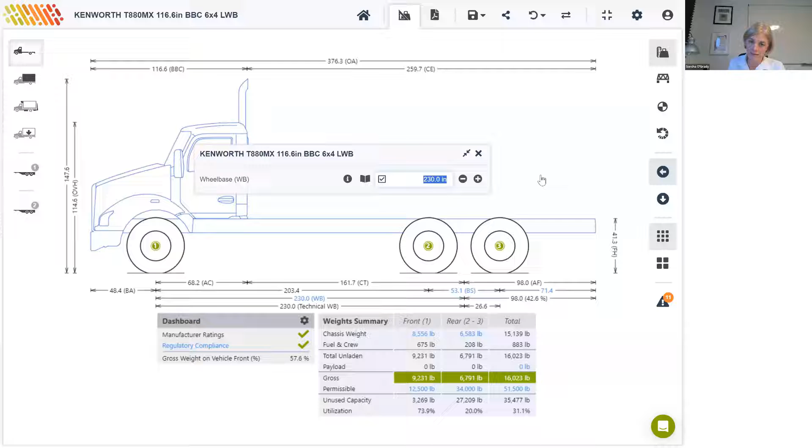There's a detailed weight summary below. I'll get to that later. You've got various views over here on the right. I'm just going to set up my vehicle first so it's ready for what I want to do with it. So I'm going to amend the wheelbase just by clicking on that wheelbase dimension. 208. Also going to shorten this overhang at the back. 29 inches.

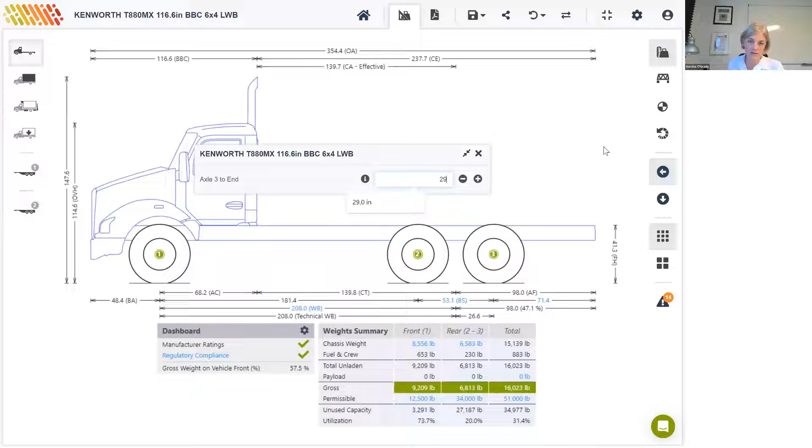And I'm going to open the vehicle menu on the left-hand side to review the axle weight ratings. So I'm going to just increase these weight ratings. Because our focus here is regulations, we don't want the manufacturer ratings to limit what we can do. So I'm going to increase these to the maximums this vehicle would typically go to. I'm going to give it a rating of 23,000 on the front axle. And I'm going to increase that tire width also to 17.5 inches.

Again, as I said, as I'm jumping around here, I'm obviously very familiar with the interface. If you're not, just try to get a general sense of what's going on, but don't worry if you don't catch everything. We could always go through it with you another time.

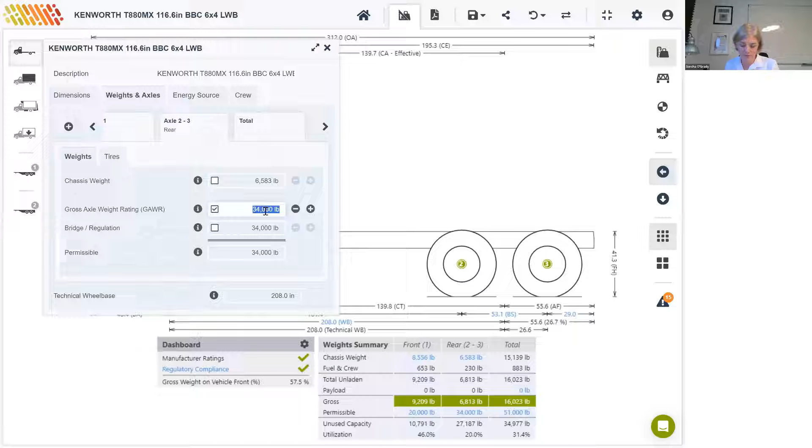The gross axle weight rating for the rear, then, I'm going to increase to 46,000. And the total gross vehicle weight rating to 80,000 pounds. So as you'd expect, this vehicle still complies with manufacturer ratings and the regulations applied. If I click into regulatory compliance, I can see that the current set of regulations that this is being compared to are the Federal Common Size and Weight Regulations.

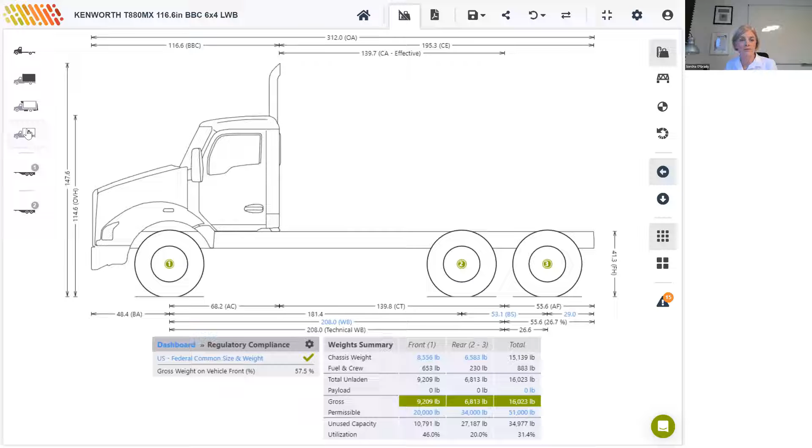So I'll add a body. From the left, I configure my vehicle first, then body, equipment, followed by payload. So I'm going to go to the body, choose a dump truck. And from my team library, I'm going to choose this 16-foot heavy-duty dump body.

So if you just glance below the drawing and take note of this weight summary, or we call it the weights table, you can see that there's distribution of weight by axle. So you've got front and rear columns, and then also the total. If you start from the top and come down, you've got itemized chassis weights, fuel and crew weights, the body weight. Indeed, if you had equipment, those items would be itemized there too. And these are all added to get a total unladen weight here of 21,525 pounds. The total unladen is the weight before payload is added.

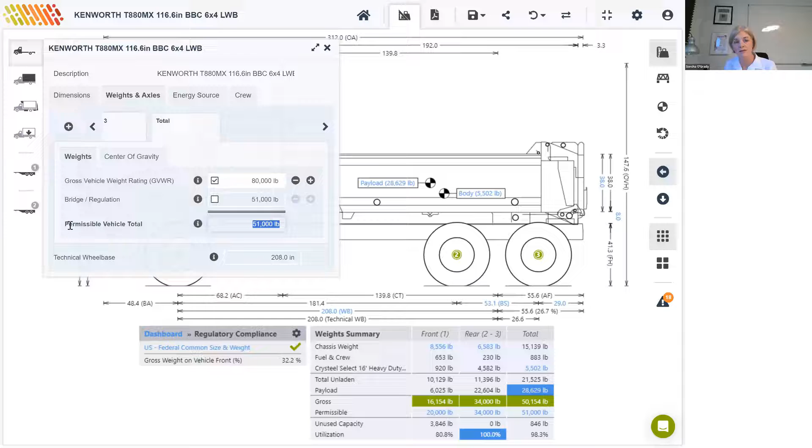We skip a couple of lines, go to permissible. Permissible is the maximum permitted on each axle based on the lesser of the manufacturer ratings and the selected regulations. So for instance, this 51,000 total limit is the lesser of the 80,000 GVWR that I specified earlier, and the bridge regulation limit of 51,000, leaving a permissible total of 51,000, which is going to limit what we can do here.

So we cannot simply subtract the total unladen from the permissible total to come up with the payload capacity, because one of the axles may reach its limit before the gross vehicle weight rating or the total bridge limit. The maximum payload is automatically calculated and then added to the unladen weight to get the gross weights on each axle and the total.

In this case, the gross weight on the front axle with a payload of 28,629 pounds, highlighted here in blue, is 16,154. Gross weight on the rear is 34,000 and total gross weight is about 50,154. The two bottom rows in this table are here for your information. They're basically two ways of representing the same information.

When the gross weight is compared with the permissible weight, it is expressed as a percentage in utilization. So 16,000 as a percentage of 20,000 is 80%. 34,000 as a percentage of 34,000 is obviously 100%.

So in this case, the limiting factor, or the permissible that is limiting the payload to 28,629, despite there being unused capacity here of 846 pounds of the total vehicle capacity, the payload is being limited by the rear axle group, the tandem axle. In other words, the tandem has reached its limit before the GVWR or the total bridge limit.

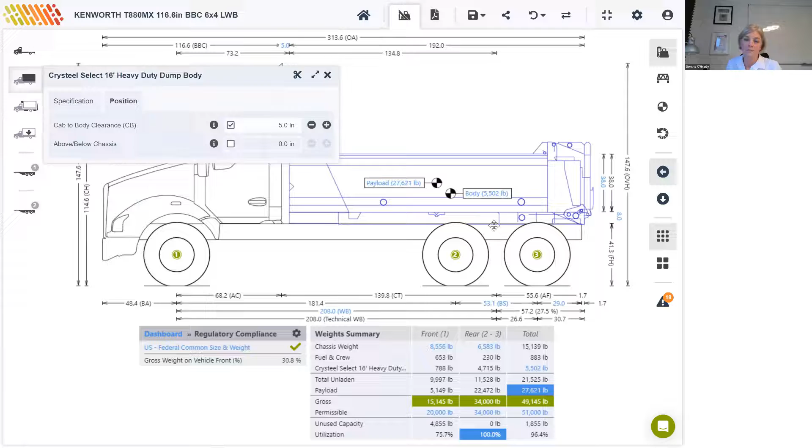So if I increase the cab gap, I will obviously be putting even more weight onto that tandem. Going to increase the cab gap to 5 inches, and you should see the payload drop ever so slightly. Payload is now sitting at 27,621. So a difference of 5 inches in the placement of the body has dropped our payload by about 1,000 pounds.

Before we switch to New York State road regulations, I'd just like to point out the permissibles here. If you take a note of them, got 20,000 on the front, 34,000 on the rear, and 51,000 total. So let's apply the regulations for New York State. Go to regulations applied here, and clear those and add in New York State.

So you'll see straight away that our permissibles have changed. We've new limits to work with. We've got 22,400 on the front, 36,000 on the rear, and 54,000 total. These are all higher than what we had on federal regulations. New York does not have the US federal bridge formula applied, so the maximum weight allowed on the tandem is 36,000 pounds.

Maximum payload now rises by about 3,000 pounds, from 27,000 to 30,079, highlighted in blue again. So we can achieve over 30,000 payload on New York State roads without a pusher axle. Let's see what happens when we add a pusher axle. Go to the vehicle menu, weights and axles. I'm going to add this pusher. And the payload has increased by another 2,000 pounds to 32,193.

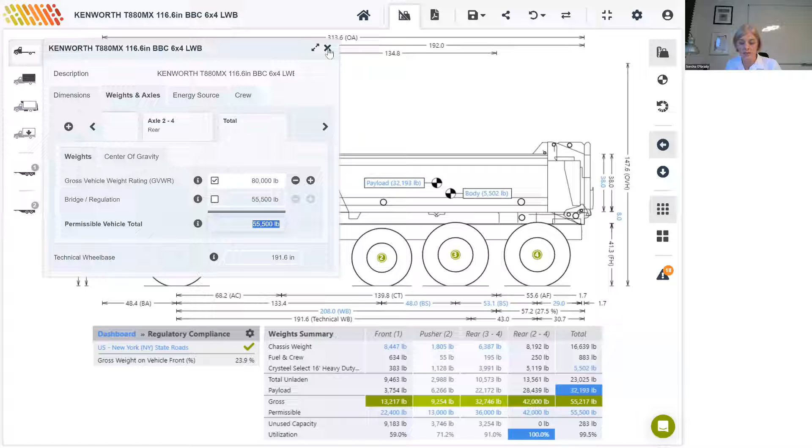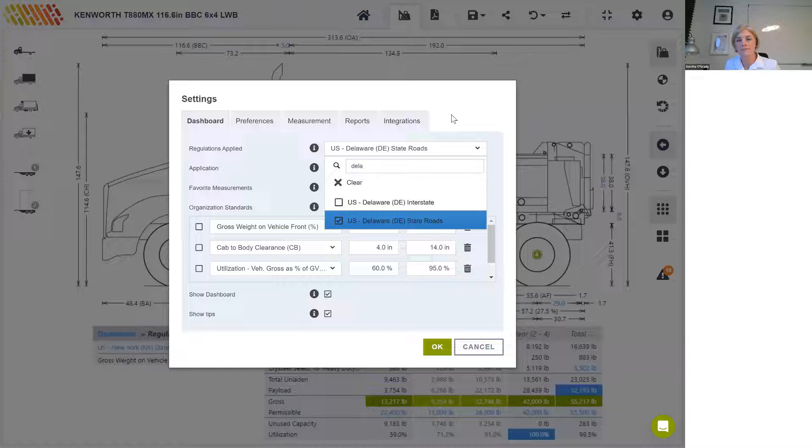Let's see how the same truck fares on state roads in Delaware. Again, I'll just go to my settings, remove New York, add Delaware. Payload figure highlighted in blue on the right-hand side has jumped by a very significant 10,000 pounds. So there's a difference with this setup between New York State roads and Delaware State roads of 10,000 pounds. We're now on 42,725. The limiting factor is now the two rear axles. Axles 3 to 4 are on 100%.

To get even more payload on there, we can try moving more weight onto the pusher axle. So if I click on the pusher permissible here in the weights table, I'm going to increase the GAWR, the gross axle weight rating, to 18,000 pounds. And I'm also going to specify the percentage of the total rear axle group weight that should be carried by this pusher axle to be 30%. And now you see we got yet another 5,000 pounds. We're up to 47,329.

Those of you who are already familiar with the program will notice that the bridge view has disappeared here from the right-hand side, and that is because there is no bridge law on Delaware state roads.

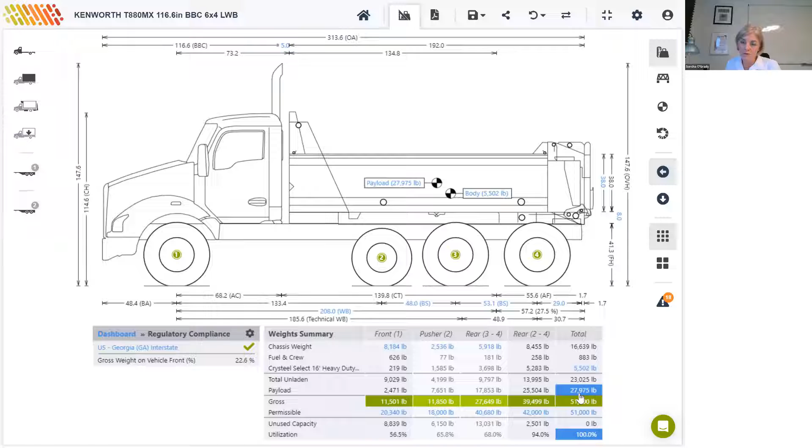There are higher axle limits though, over 40,000 here on rear axles 3 to 4. If I click into it, you can see that that's coming from our regulations, 40,680. The issue here is that Georgia doesn't recognize auxiliary axles, so the pusher axle does not have any impact on the overall gross weight. Maybe the regulations were written before there were lifting axles. So it makes sense anyway to remove this pusher in Georgia because it's only adding to the weight of the vehicle and not gaining any extra weight from the regulations.

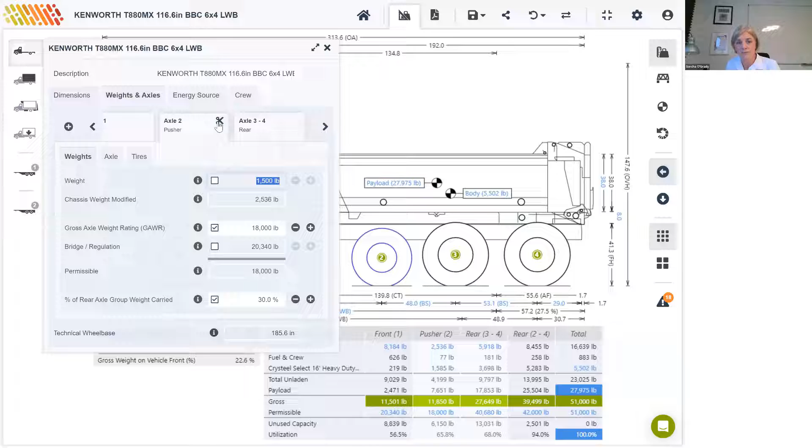So as I remove that axle, you see the payload rises back up to 29,000 because I'm gaining the weight of the axle itself. And now we're getting a little more than we would under federal law. Now let's take the truck out west. We're going to go to Idaho next.

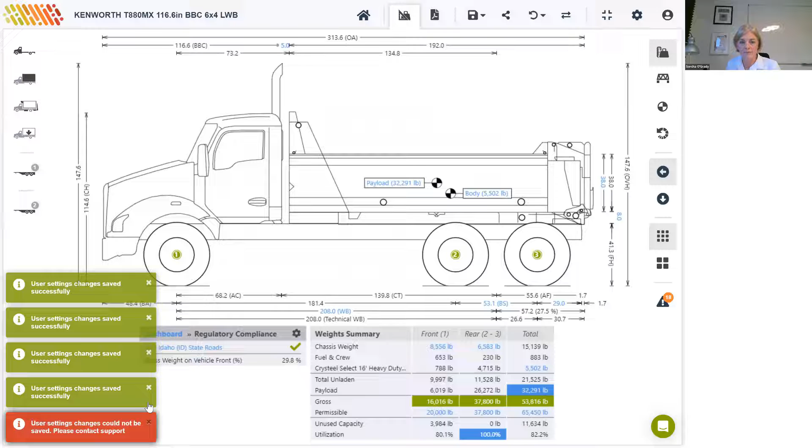Sorry, I clicked that a couple of times too many.

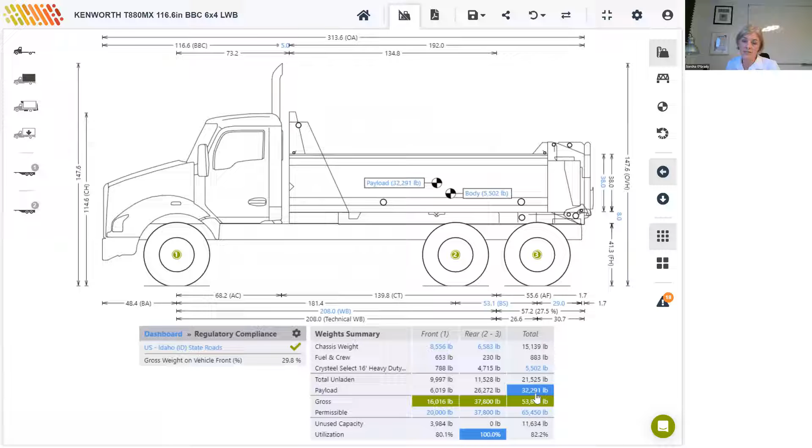You can see here in the permissible row for axles 2 to 3, or the tandem axle, we've got a limit now of 37,800. Indeed, any group of axles with a total distance under 13 feet will have that limit. We've got a payload of 32,291. We can try adding the pusher back now that we're out of Georgia.

We go to vehicle, weights and axles, and pusher. And that's a little bit disappointing. We are down to 27,438 pounds of payload. So the pusher axle doesn't give us a higher limit on the tridem axle group. It's still 37,800 on axles 2 to 4, as you can see here in the weights table. And axles 2 to 4 are the limiting factor.

They're at 100% utilization. So I mentioned that we have different views on the right here. You'll see the bridge icon is back in the second icon there. Bridge is back because we're in Idaho now and the bridge applies. Let's switch to the bridge view to examine the axle spread. So if you look at axle spacing here on the left, you can see that the distance between axles 2 to 4 is 101 inches.

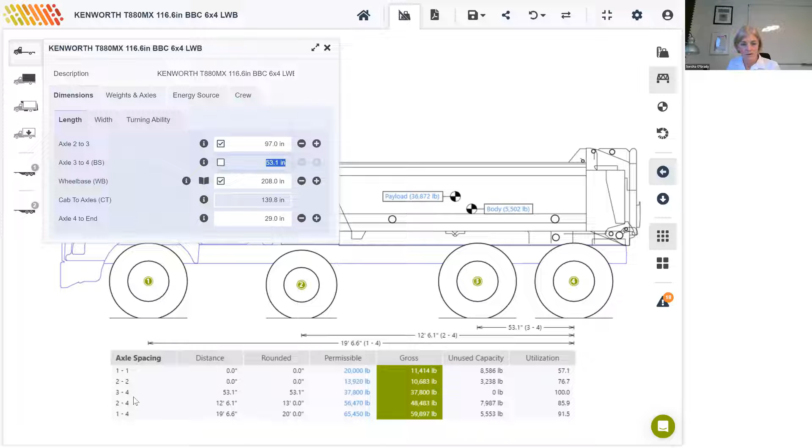We want to go to 13 feet on that axle spread to take advantage of the higher limits in Idaho. So we need to find that axle 2 to 3 dimension. We're going to go to vehicle, dimensions, length, axles 2 to 3. And I'm going to increase that to 97 inches. Now, if you look at the axle spacing again underneath the drawing, you've got axles 2 to 4, and their rounded distance is indeed 13 feet.

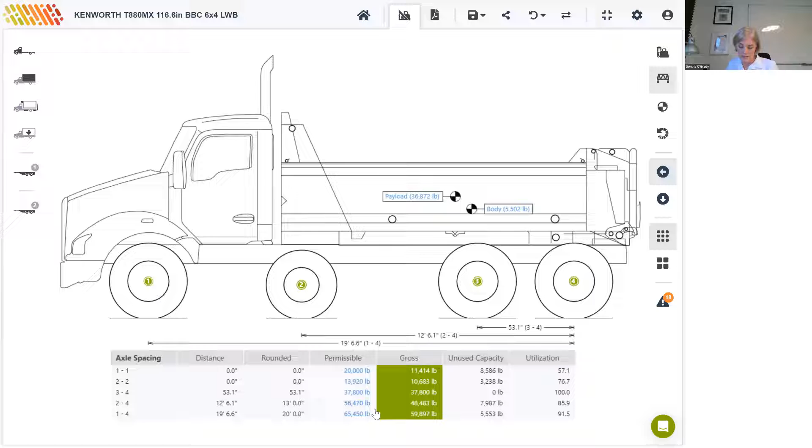So the permissible for the tridem group increases now from 37,800. Let me just get the weights table again. From axle 2 to 4, from 37,800 to 56,470. And the payload has increased from around 27,000 to almost 37,000, 36,872 pounds there.

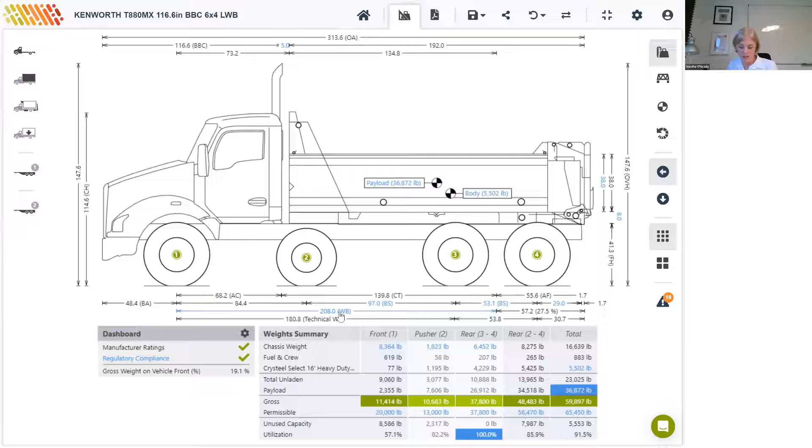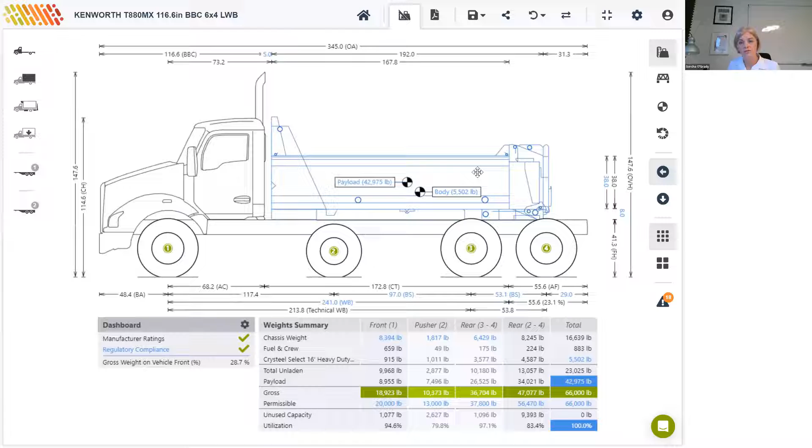But we're not maxing out the overall capacity of the vehicle. You can see that there's an unused capacity in the total column, second row from the bottom, of 5,553 pounds. So we can try increasing the wheelbase and maybe opting for a longer body. I'm going to click on the wheelbase dimension here and increase it from 208 to 241 inches. And I'm going to replace the body with a longer one. So I'll just cut that one right off.

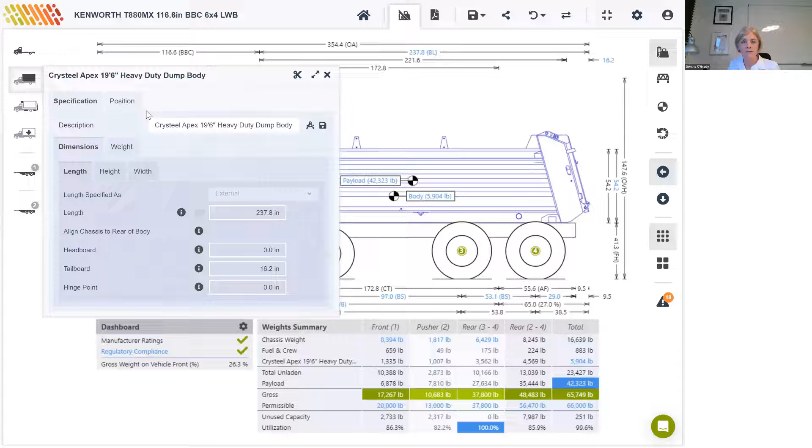And this time I'm going to add a 19.5 foot body. Give it the same distance from the cab, 5 inches. And see, our payload now is at 41,012 pounds. So let's see what happens when we move that first pusher axle back and add a second one. So I'm going to first reduce this axle 2 to 3 spacing from 97 back down to 48 inches.

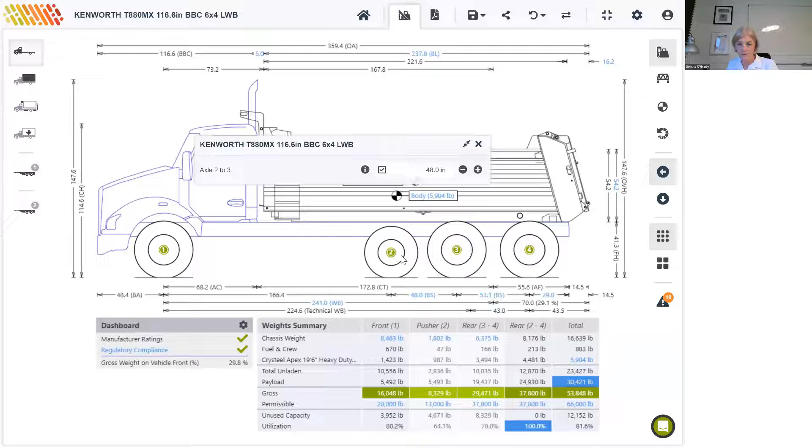And you can see that the limiting factor is the rear axle group there. I'll add a second pusher axle. And the limiting factor is still the quad axle group. If we go to the bridge view again and check the axle spacing here from axle 2 to 5, we have a rounded distance from axle 2 to axle 5, highlighted under the drawing there. It's just short of 12.5 feet. So we need to get that up to 13 feet when rounded up.

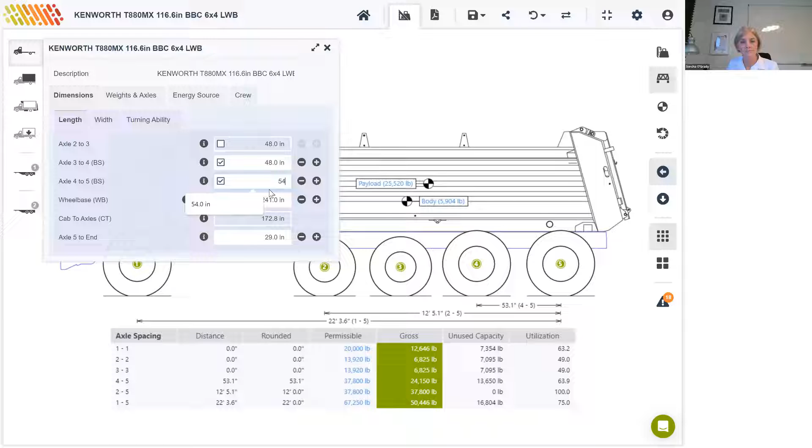So I'm going to change the tandem spread from 53.1 inches, that's axle 4 to 5. I'm going to increase it by not even an inch to 54 inches. Now you can see we've got our desired spacing on axle 2 to 5 of 13 feet. And the payload, as you can see highlighted on the drawing here, has increased to 42,323, which is another 2,000 pounds of payload.

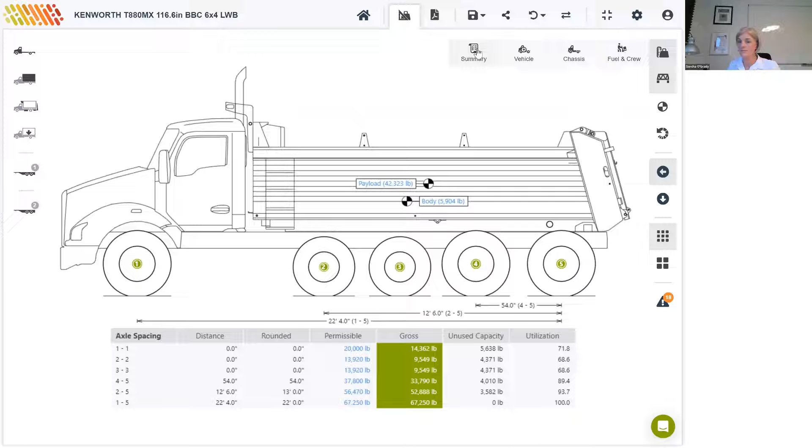And we are limited now by the overall bridge of Idaho. That is the 67,250 pounds. As you can see in the total row, the utilization is at 100% of the total capacity of this vehicle. And by total capacity, I mean permissible, and that is the lesser of the manufacturer rating and the bridge limit for Idaho.

And so in some states, you don't get more by adding more axles. It comes down to the overall distance between the front and rear axles. In other states, adding axles is the key. So it's just very important to know where this vehicle, more importantly, is going to be operated. Let's take this same truck across the border into Washington State. We're nearly there.

Total bridge limit. So if we look at the permissible row again, the total column has fallen now from 67,250 down to 61,500. And the permissible for the pusher axles, if you see pusher 2 and pusher 3, has also dropped from 13,000 to 11,600. That is not limiting our payload because the payload is being limited by that total limit.

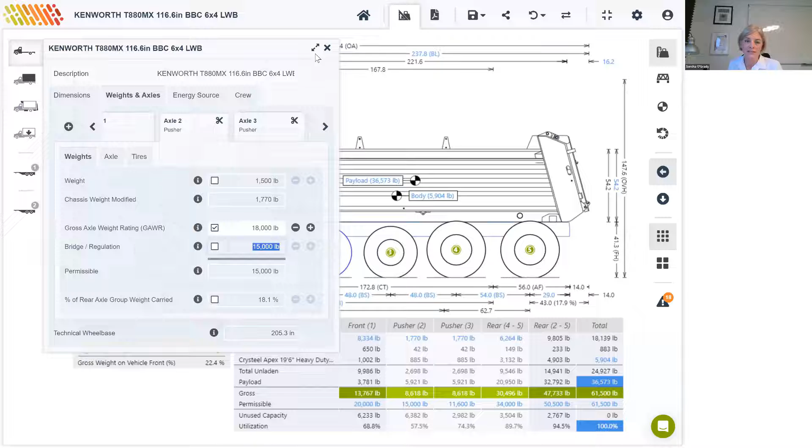If I, for instance, change those tires to 15 inches, you'll see now I'm up at 15,000, which was the limit, the GAWR of that axle. We had increased that to 18,000 previously. So now we're getting the 15,000 from the width of our tires. Okay, so we're down to 36,573 pounds of payload now.

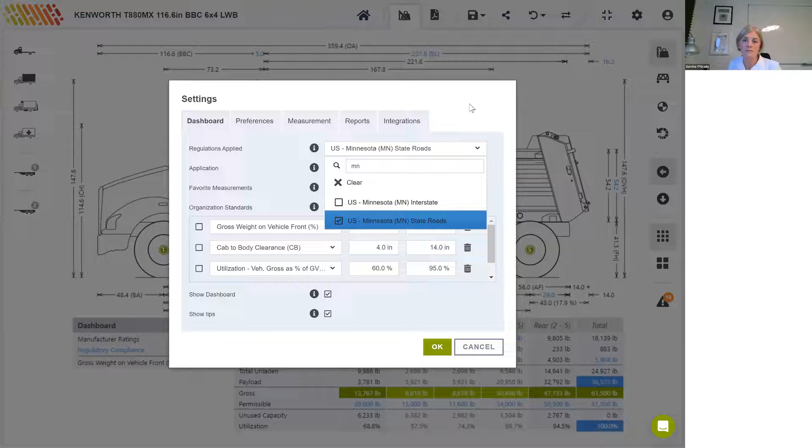We can maybe just take a couple more examples. I'm going to try this one in Minnesota. We go on state roads in Minnesota. I didn't unselect the previous ones. And there's no change at all to the payload here because, again, federal bridge laws are applied.

Let's try locking the payload. As we've been working through these examples, the payload has been automatically recalculated based on what the current limits are. But I'm going to lock it at 36,000 now for a moment. And I'm going to add regulations for Iowa.

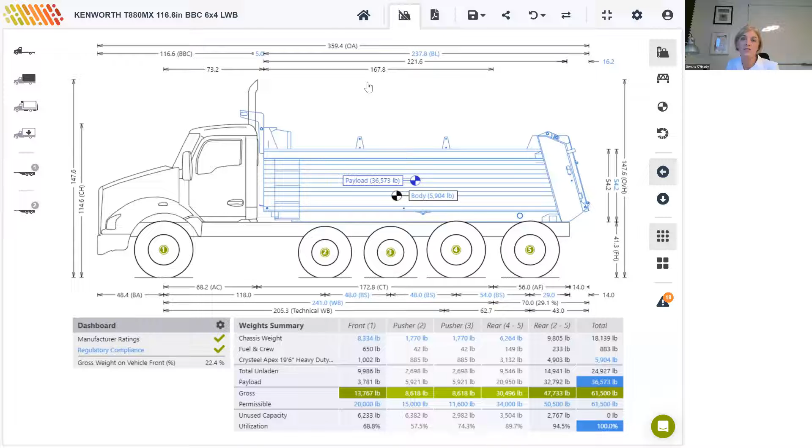So if this vehicle is operating between Iowa and Minnesota, we can add Iowa, but we leave Minnesota regulations also on. You can verify your calculations against up to 5 sets of regulations at once.

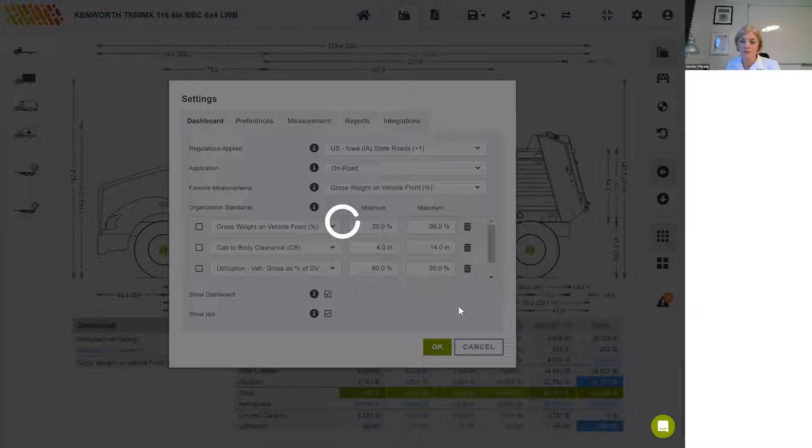Nice, Sorcha. I just have a question here from a participant. It's about what is kind of a safe level for utilization. And I was mentioning in the chat that we can also set up organizational standards to help people guard against going too close to that 100% mark. Okay, I'll show you how to do that in just a moment.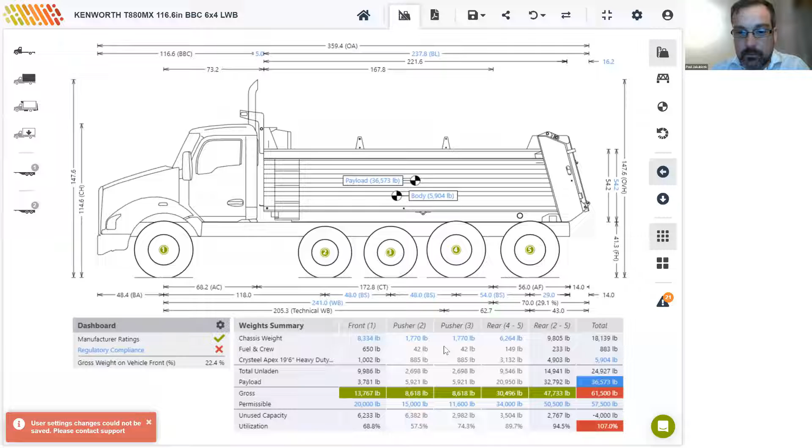Okay. And is that the only question, Paul, you want me to cover? Yeah, so far that's the only question. Okay, thank you. Okay, so I keep clicking this button twice, so that's why I'm seeing that error message.

I had just locked the payload to what we could achieve in Minnesota before also adding the Iowa regulations. So you see we have a problem now. Our regulatory compliance is shown with a red X. And if I click into that, I can see that this combination is still legal in Minnesota, but there is an issue in Iowa. And you'll see we're on 107% utilization based on the Iowa limits now.

So there obviously are lots of scenarios where vehicles can be legal in one place and not in another, and that's something you can examine. If I just unlock the payload again quickly, we'll get the maximum payload that's achievable for both Minnesota and Iowa, and that's obviously being constrained by Iowa. So we're back down to 32,000.

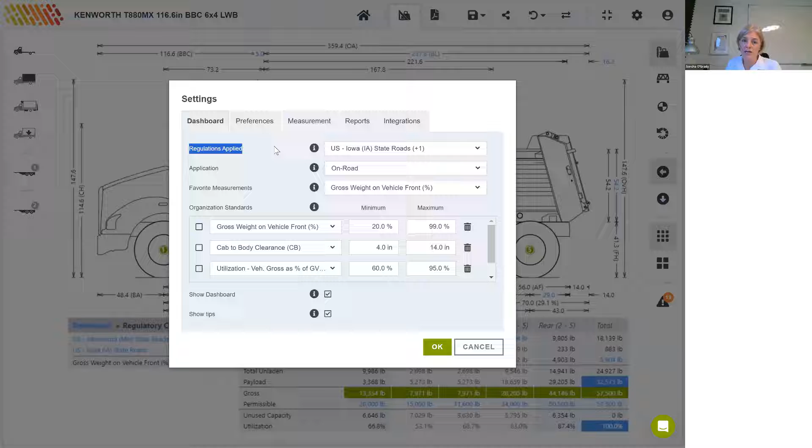Okay, we can move to Canada for just one example in a moment, but before I do that, I'm going to add that organization standard that Paul spoke about. So I have my little setting cog here, up the top. We've already been playing around a lot with the regulations. We can add favorite measurements. For instance, we can add utilization.

And there are a few different ways to express this. A vehicle gross as a percentage of the GVWR, I think, is probably, well, let's add both of these. The gross vehicle weight as a percentage of the GVWR, being the gross vehicle weight rating that Kenworth has rated this vehicle at.

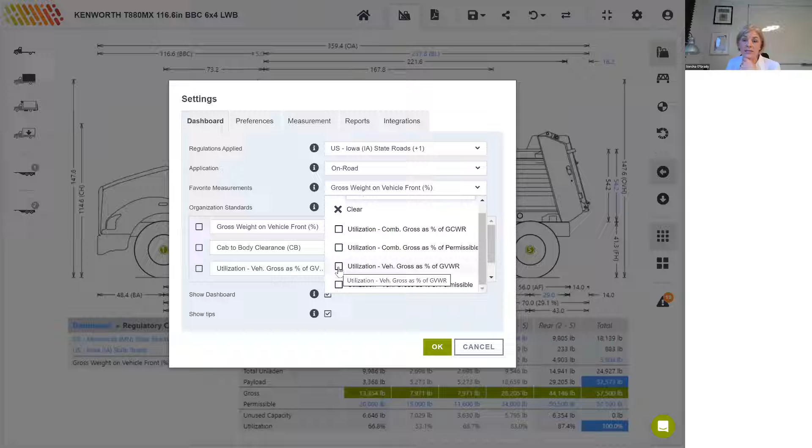And then you can also do the gross vehicle weight as a percentage of the permissible. And the permissible is just the lesser of the GVWR and the regulation limit. But we can add both of those favorite measurements. So I'm just going to add those first so you can see what happens with those.

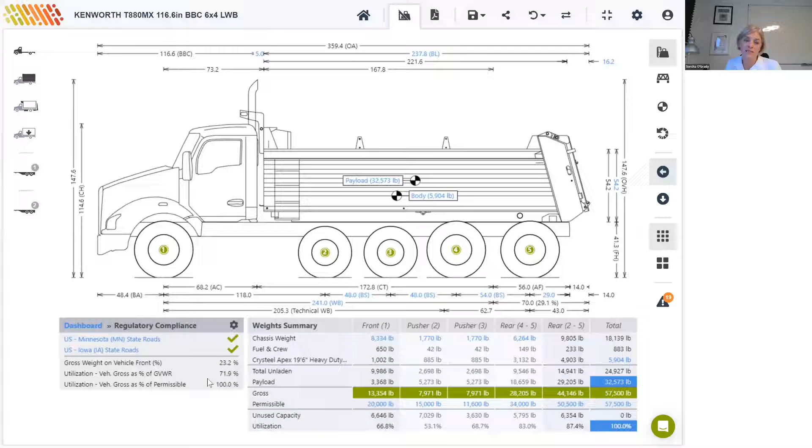So now we've got utilization. If you just look to the bottom left of this dashboard on the left-hand side, we've got the vehicle gross weight as a percentage of the GVWR. So we're at 72% of what Kenworth says this vehicle can carry, although we're at 100% of what we're permitted to carry, and that's based on the regulations in Minnesota and Iowa.

So I guess in answer to your question, you may not want to be maxing the vehicle out at 100%, but you're probably happier to max the regulation limits out. But anyway, that information is there, and you can do as you please with it.

The other thing that Paul mentioned now was organization standards. So we talk about 3 pillars of compliance. Manufacturer ratings, we obviously have to comply with those. Bridge or regulation limits for the jurisdiction the vehicle will operate in. And then the third area that you can set up compliance indicators for is your own company's rules of thumb or best practice.

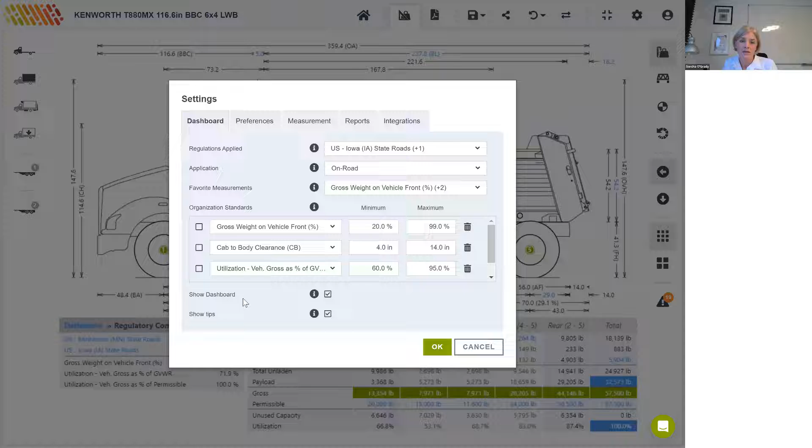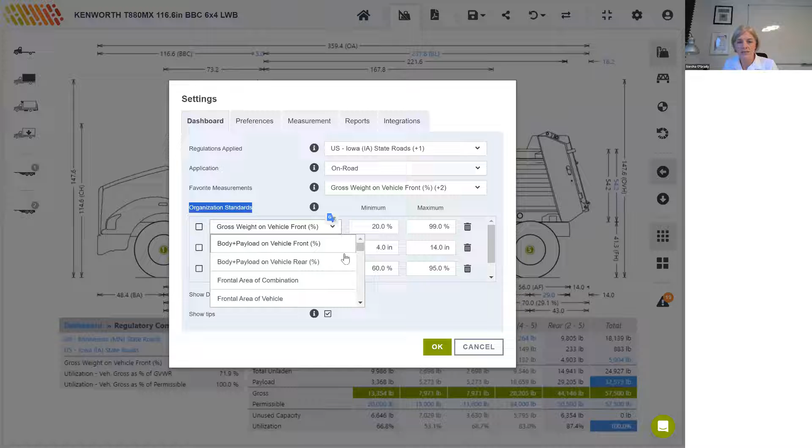So I'll just show you where you can add those now. This is all in your settings dashboard, organization standards. Sorry, I just wanted to highlight that one heading there, organization standards. And I don't have any of these switched on at the moment, but I'm going to add one now for utilization. So if I just scroll near the bottom, I'll find vehicle gross as a percentage of permissible.

And I'm not sure why I can't see the other one, as a percentage of the GVWR there. I'll check that. Oh, because I already have it here. Okay, so I can say I'm happy for the vehicle gross as a percentage of the permissible to be between 0 and 100%, for instance, but I would like the vehicle gross as a percentage of the GVWR or the vehicle's rating to be between, say, 60 and 90.

So I don't want to spec a vehicle which is being totally underused. I also don't want to spec a vehicle that's being used to its limits. So I can switch the 2 of these on now by just ticking those. I can keep them configured, but switch them on and off as I please. And so I'm just going to OK those. So we've got 0 to 100 on the permissible and 60 to 90 on the GVWR.

And now if I just go back to my dashboard, I can see that I'm complying with the manufacturer ratings, I'm complying with regulatory compliance, and I'm complying with organization standards. If, for instance, I override this payload very significantly, you can see that I'm breaking everything now. I'm breaking the manufacturer ratings, or what Kenworth said the vehicle could carry. I'm breaking the rules of the road, and I'm breaking my own organization standards.

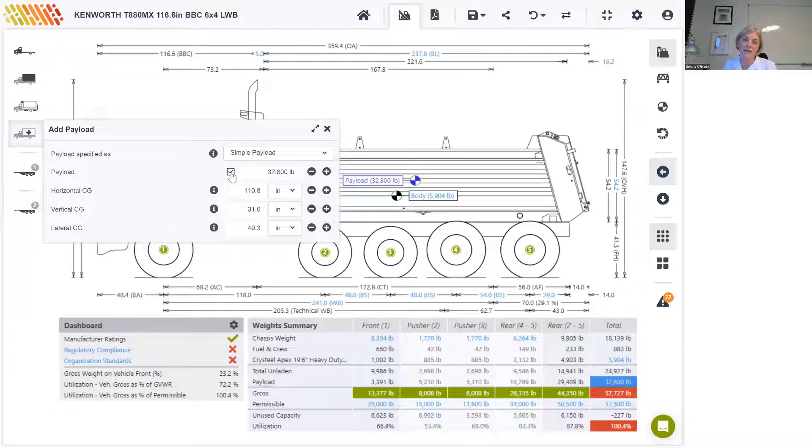You can set up your own in-house checks so that, while you might be compliant, you have your own best practices about how you deal with these limits. I hope that answers your question. Paul, have you got another question?

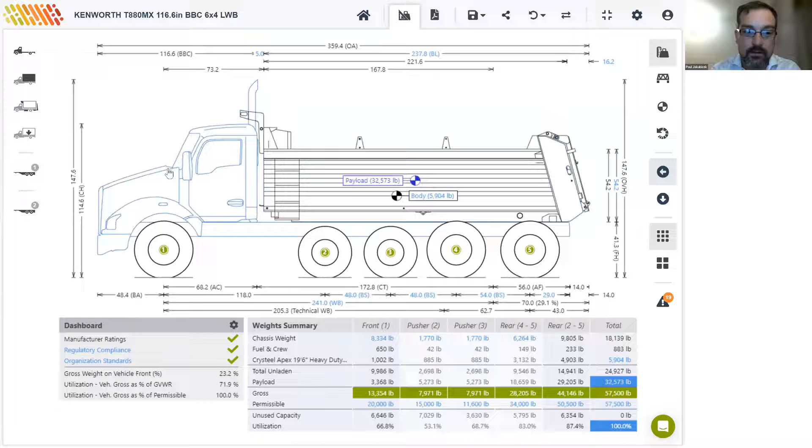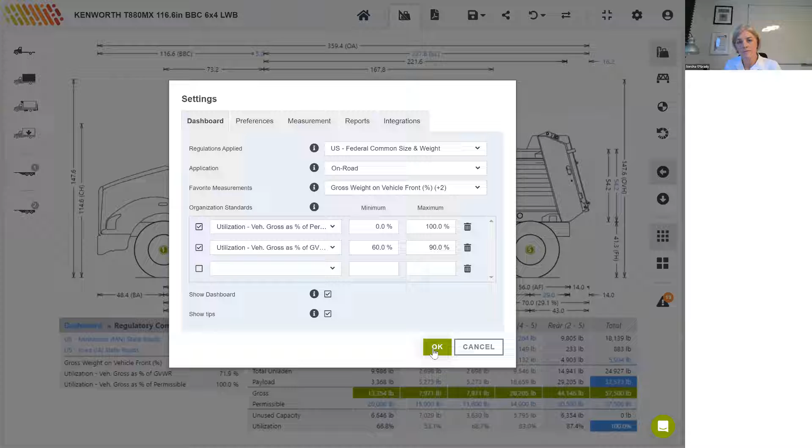Yeah, I have an interesting one about CNG weight analysis, and I figure if you're still looking at the US, then we could take a look and see what impact changing to a natural gas powered vehicle has on that weight, especially on the US common regulations. Okay, so I'll just switch to common regulations quickly. And would you like me to switch the energy source? Yeah, if you switch the energy source to compressed natural gas, then you can see the impact that'll have.

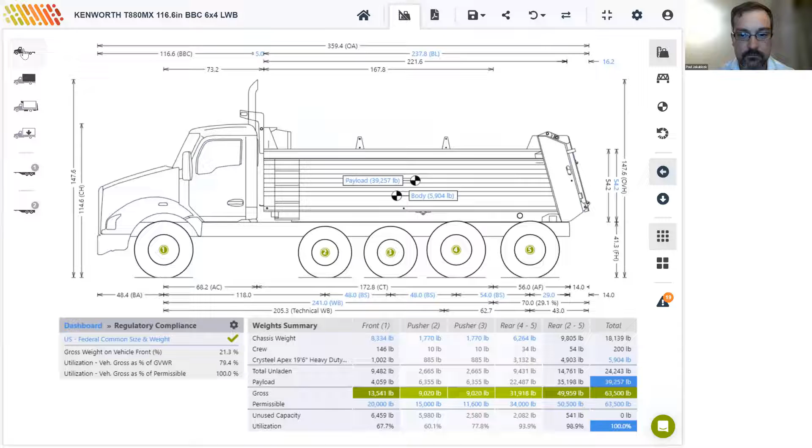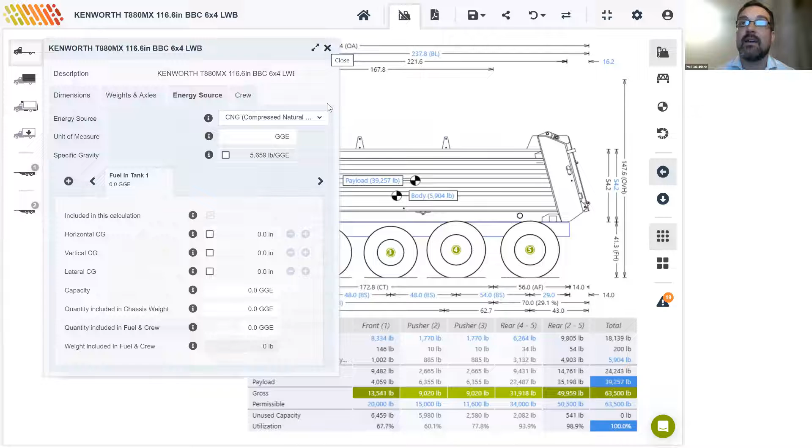So I'm not sure if everybody noticed, but you are getting that exemption of 2,000 pounds on the bridge law in the US with a natural gas or battery electric vehicle. So that exemption is in those regulations there. The question was specifically about a cab over chassis like one that Mountain Motors might have, but the energy source will govern getting that U.S. federal exemption. And so in that case, the total permissible increased from 61,500 to 63,500.

Is that right, Paul? Yeah, that's correct. You get an extra 2,000 pounds. Okay. Any other questions before we move on?

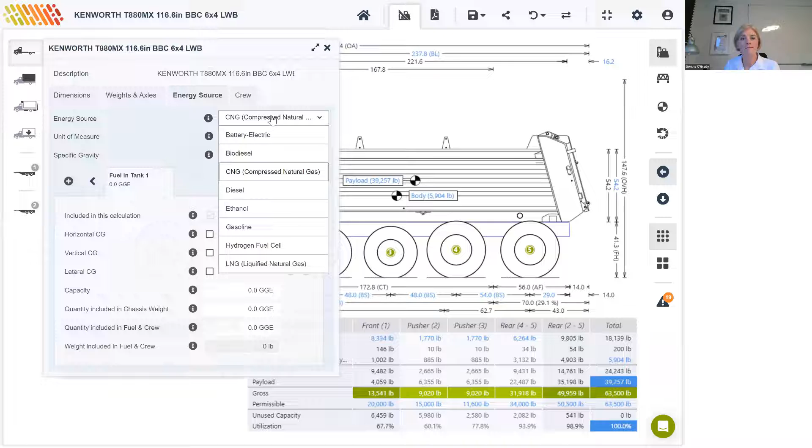No, I think you can go ahead and I'll get to them.

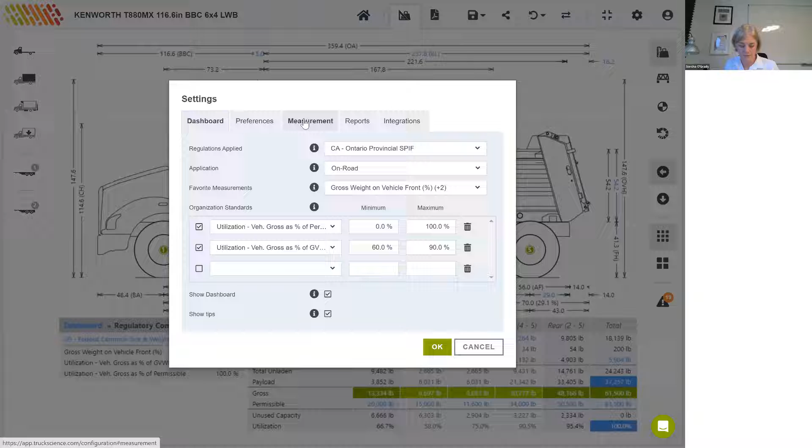Okay, I'm just going to switch it back to diesel so everything is predictable for me here. Okay, so we're going to just quickly try this one in Canada. I'll remove those federal regulations and I'm going to just choose Ontario. I'm also just going to switch the measurement system to metric. The program is a little bit slowed down by me sharing my screen, so I just have to be patient with this. Metric.

Okay, so this brings up a few notable things on the screen here. The first one is that this is new. This is something new we've started here, to add tips that pop up in the bottom left, tips pertaining to your particular configuration in the jurisdiction that it is currently in. So for instance, this one just points out that only one pusher axle is allowed in Ontario on a truck with a 6x4 axle layout. So we're going to have to remove that second pusher. I'll do that now.

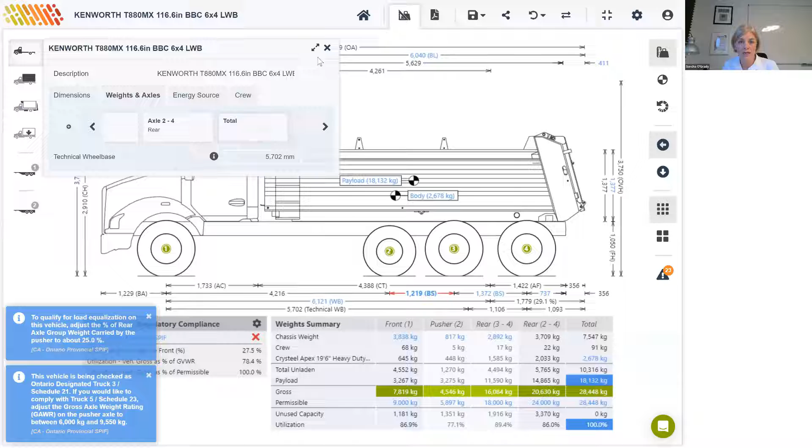And that removes that warning, but we're left with a couple more. So the first one, or the tip rather, is that the vehicle is being checked as a truck 3 designation. And if you'd like to comply with truck 5, it's just showing you how to do that. We'll just stay with truck 3 for now.

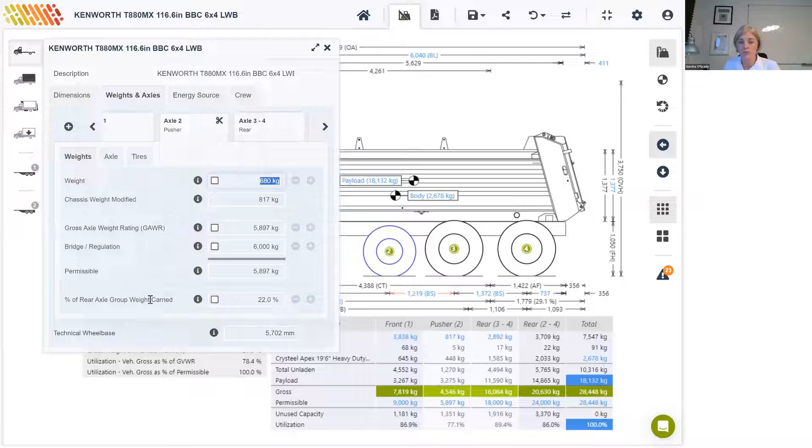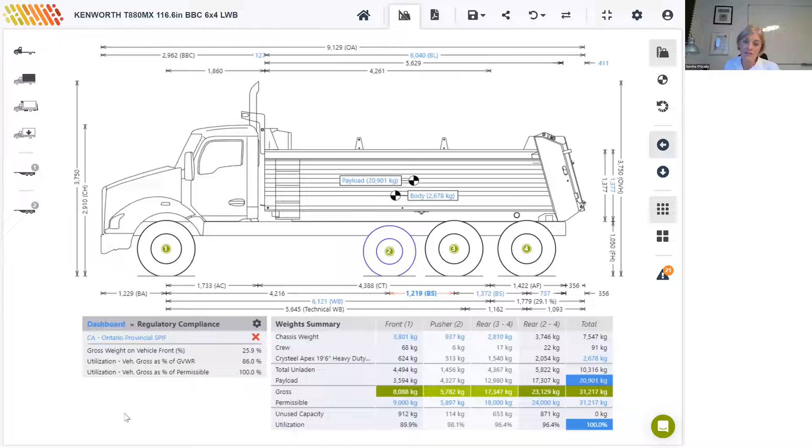And then one more tip here: to qualify for load equalization, adjust the percentage of the rear axle group weight carried by the pusher to about 25%. So we saw how to do that earlier. If I click on the pusher axle, the percentage of the rear axle group weight carried on the pusher is currently set to 22%. We can increase that to 25%. And so that tip goes away. So we've fixed that one. That obviously reduces pavement damage if the load is more evenly spread across the axles.

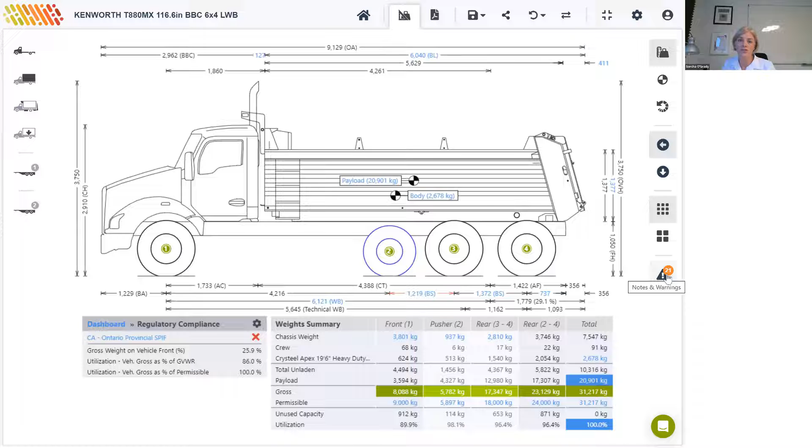We still have a problem though. Ontario regulations are being flagged here with the red X. And if you look at the drawing itself, you'll see that there's a red dimension here, 1219 spacing between axle 2 and 3. We've also got some notes and warnings over here on the right, and you'll see there are 21 notes and warnings which have accumulated as we've gone. I haven't been drawing your attention to those, but if I open it now and go to warnings, you'll see that the distance from the liftable axle to the rear driven axles does not meet the legal minimum of 2,300 millimeters. So if I change this to 2,300, which is the minimum,

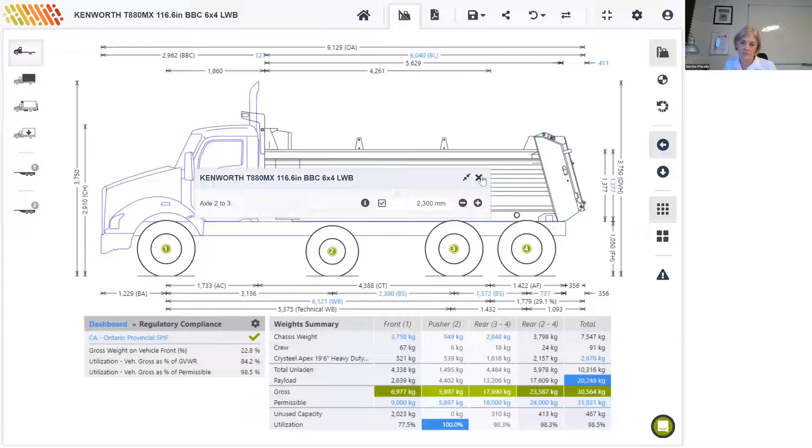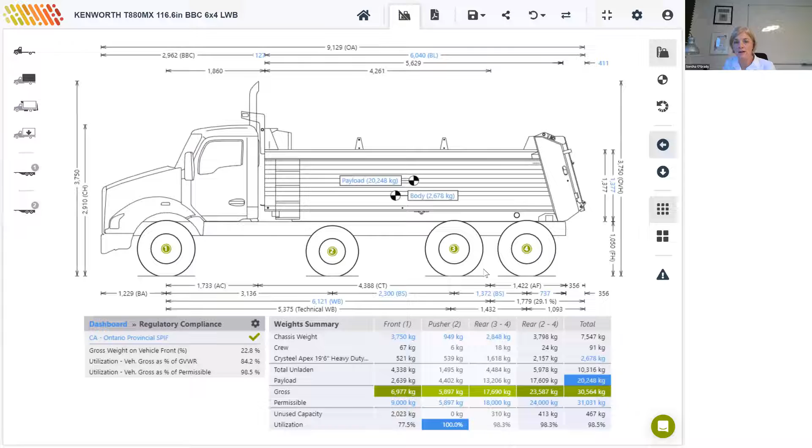our Ontario regulations are now getting a green tick. The dimension on the drawing is behaving as expected. And now we've got a nice dump truck for Ontario. So the last step then, what we would normally do when we've got this far, is to just print a report. Just going to generate a report here for sign off. And that's kind of the end of our work here. Paul, have you any more questions before I just flick back to my presentation briefly?

Yeah, I had an interesting question about whether we have heavy haul regulations in the state of Missouri. Specifically, there are these heavy haul zones in and around various places in Missouri, and we don't actually have those specific regulations yet. But I mentioned that we are able to add those on an ongoing basis as we come across ones that more of our customers request.

And then I had another question about just opening and saving calculations. Once we have everything configured really nicely, can we save it? And so yes, we can save and open the calculation there in a list inside the app.

Okay, and just to expand on that, I can save a PDF document, which is a read-only view of my calculation. I can save a live calculation, which I can share by email with anyone I'm collaborating with. They don't necessarily have to be users of TruckScience. They're offered a free trial to open a calculation and move things around if you want to get somebody else's advice on it. And then you can also import drawings of, say, bodies or equipment and save those to your own library too. So you can save the printouts, you can save the calculations themselves, and you can save the components of the calculations.

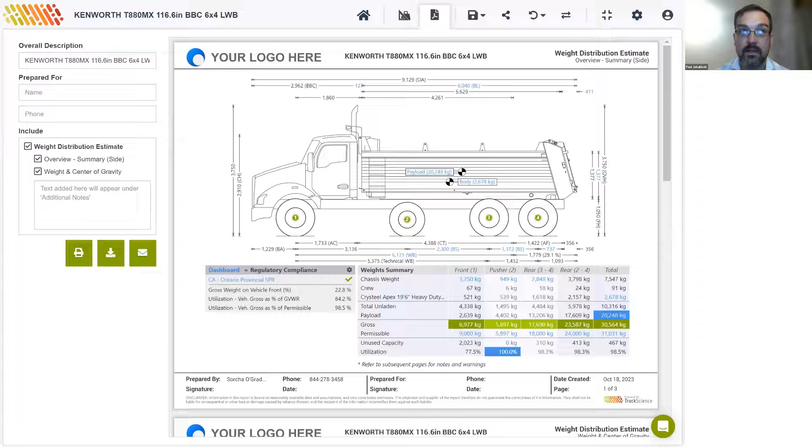There's also a question about how you discussed saving only 5 states, or opening the calculation with 5 regulations applied, and if there's a way to check against all of them. What I suggest there is to think about using those U.S. common size and weight regulations or the Canadian MOU regulations, because they are the kind of lowest common denominator in both countries, and so you should be able to operate your vehicle with those regulations across the entire country.

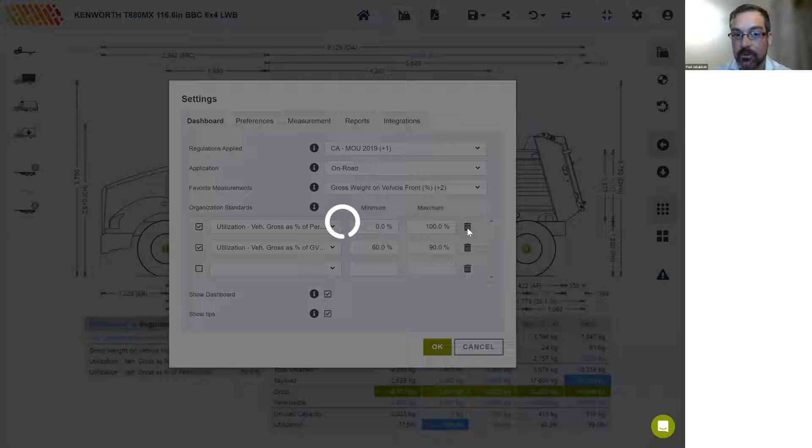However, that being said, there always are exceptions, and like you discussed, the state of Georgia is an exception that isn't very well known, and it applies on the interstate as well. So it really is to know where the truck is going to be operating, and drill down into those interstate regulations on a state-by-state basis.

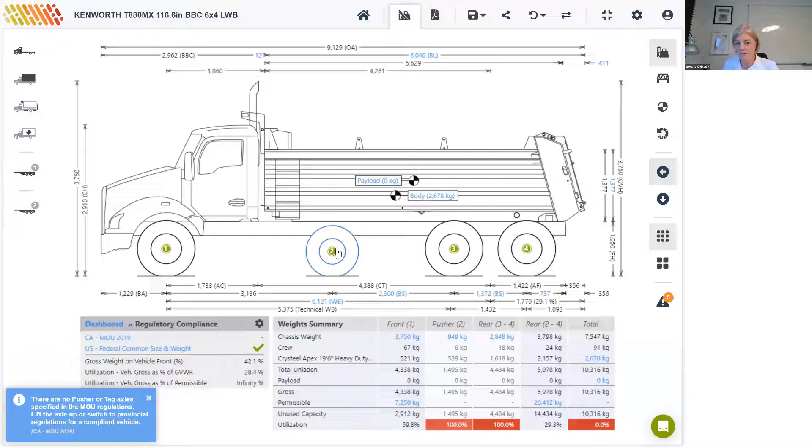Okay, so again, we've just run into a problem with the MOU here, but I'll remove the pusher. Yeah, in the MOU regulations, there's no pusher axle specified, so the app won't return any values there, and only in Ontario you can have a pusher axle on that vehicle.

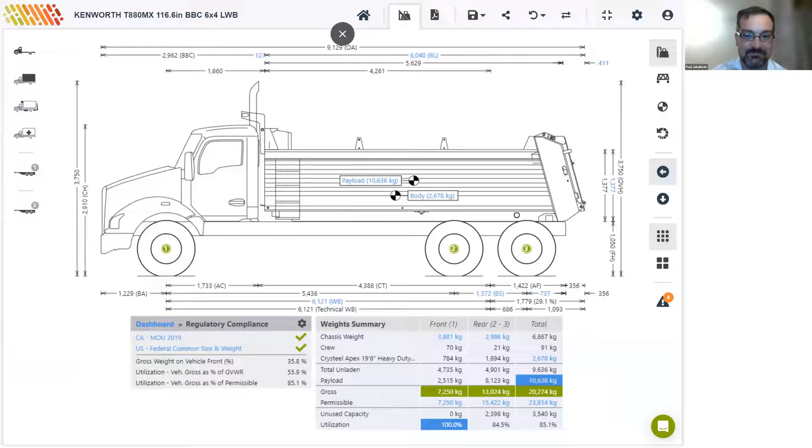Okay, thanks, Paul. Anything else before I move on? No, that's it. Thanks. Okay, great. I'm just going to pop very quickly back to my presentation.

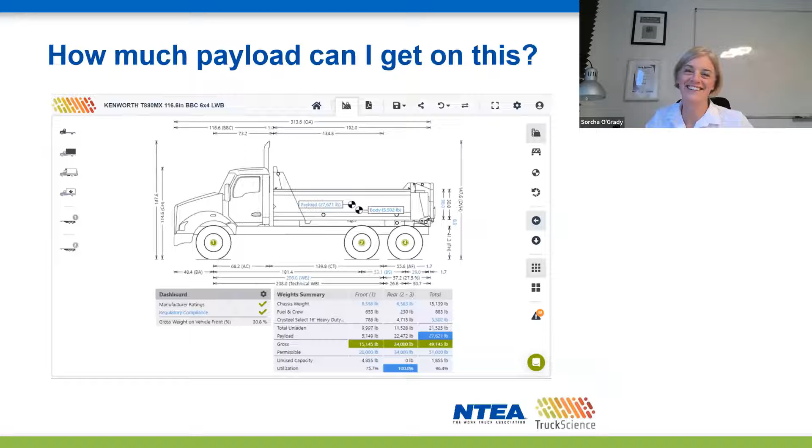It will be interesting to know who guessed the payload correctly on this. As we traveled from New York to Delaware, all the way through Minnesota, Iowa, up to Ontario, we saw the maximum payload fluctuates quite wildly, between say 27,500 pounds right up to over 50,000 pounds. So can we ever really say how much a truck can carry without first asking where it is going to operate?